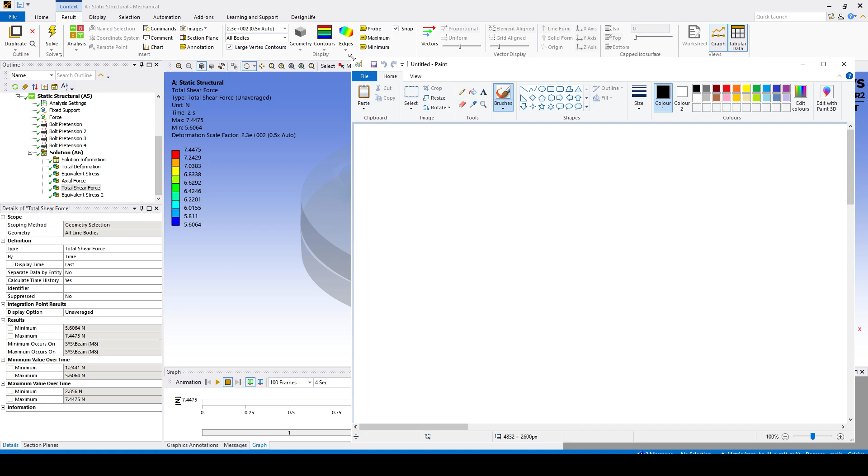What you have to get from this analysis to check the bolt is the shear force acting on the bolt. Clicking on the shear force, as you can see, we got around 7.4 newton as a maximum shear force. So let's write this alongside. Shear force, we get around 7.4. Let's make it 8 newton to be conservative, just as a shear force acting on this bolt.

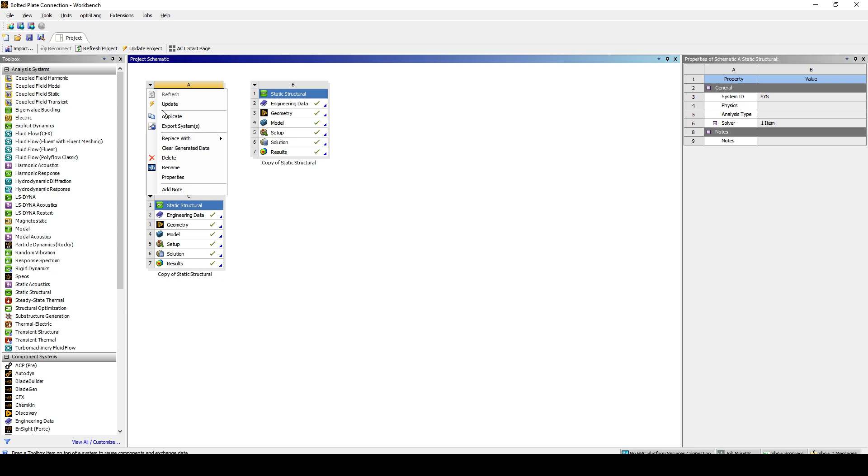Now, for the next step, we need to know the axial force acting on the bolt, but without defining the bolt pretension. To do this, you go back to the Workbench schematic, duplicate this analysis and run the simulation again, but without bolt pretension. I already did this, so I will show you in steps how this could be done.

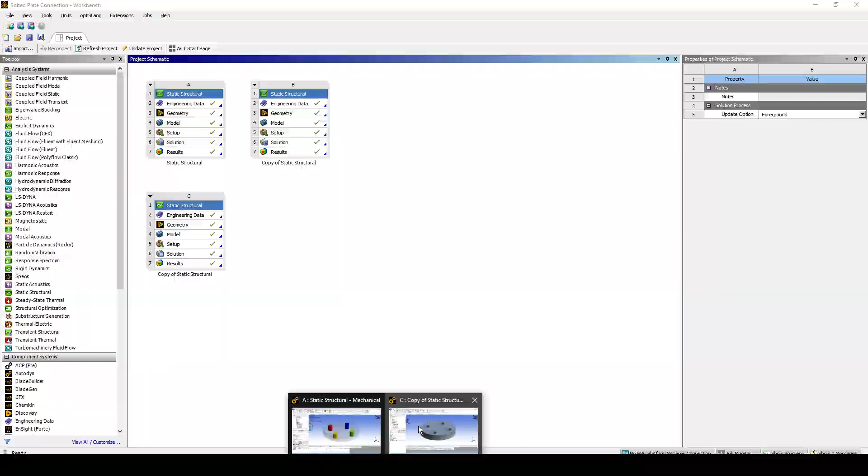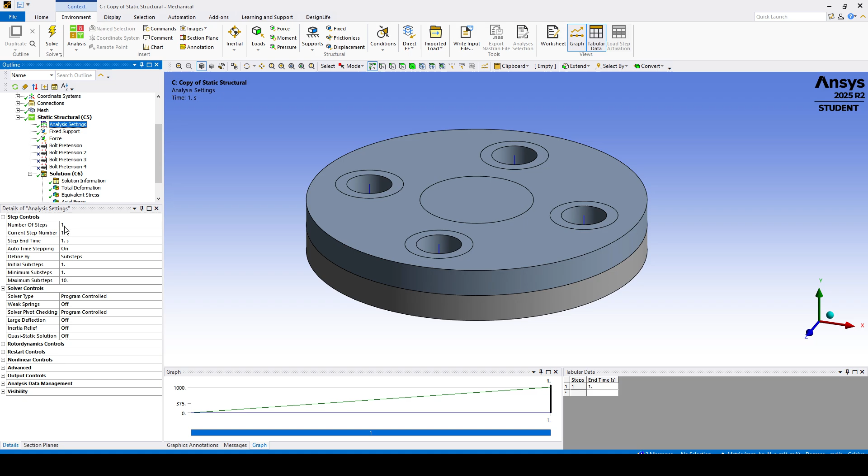After duplicating this analysis, you will get a new analysis. You open it, and you have to suppress all the bolt pretensions by clicking on them and clicking on suppress. Because you suppressed the bolt pretension, there's no need anymore to define two steps in the analysis settings, so you can define just one step instead of two. And don't forget to go to the force and move the 1000 newton to the first step. Like this, the analysis will be ready.

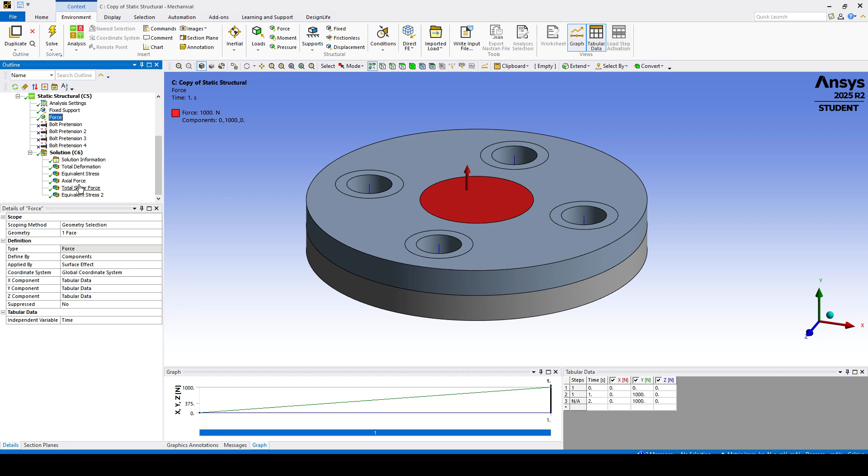After you define the boundary conditions like this, you go to the solution and solve the problem. Then all you need from this new analysis is to check the axial force acting on the bolt, which is the external axial force. As you can see here, we have around 416 or 417 newton acting on the bolt. So let's write this aside: axial force on this bolt is 417 newton.

Now let's go further and see according to the VDI guidelines if the chosen M8 bolt was okay or not. From the guideline itself, you can see on the screen to the left this table and the approach for how to use it. First of all, we have to check one condition. If the shear force divided by the frictional coefficient is greater than the axial force, then the shear force will govern and it will be the force used in the table. If it's vice versa, and the axial force is greater than the shear force divided by the frictional coefficient, then the axial force is to be selected.

Let's do an example together. First we check the 8 newton shear force divided by the frictional coefficient, which in our case was 0.12. So 8 divided by 0.12, I get around 67. Let's write here 67 newton. Now we compare this value to the axial force, and as you can see it's still much lower than the axial force. That means we should use the axial force in the table to see if the bolt size is okay or not.

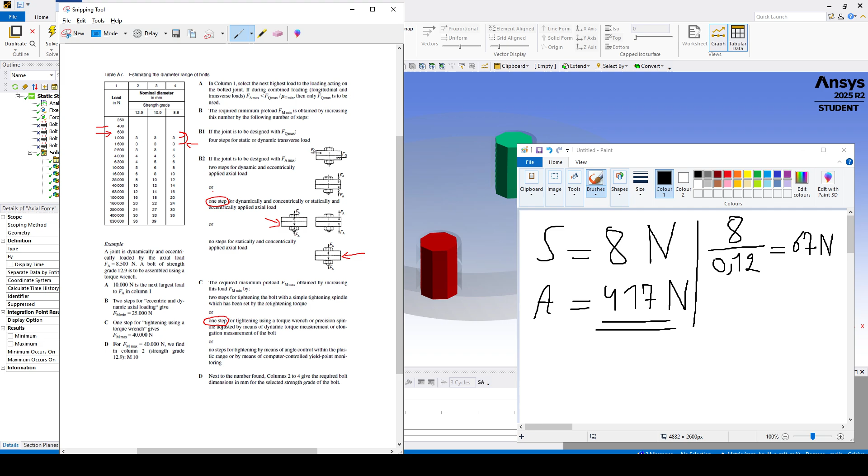This is a very simplified way to check if the bolt size is okay or not under the load defined on our system. We only had 1000 Newton as a vertical force acting on the top plate, which is not too much for these 4 M8 bolts, but according to VDI with this simplified way, we are sure now that the bolts are okay. This is the simplest way to check the bolts.

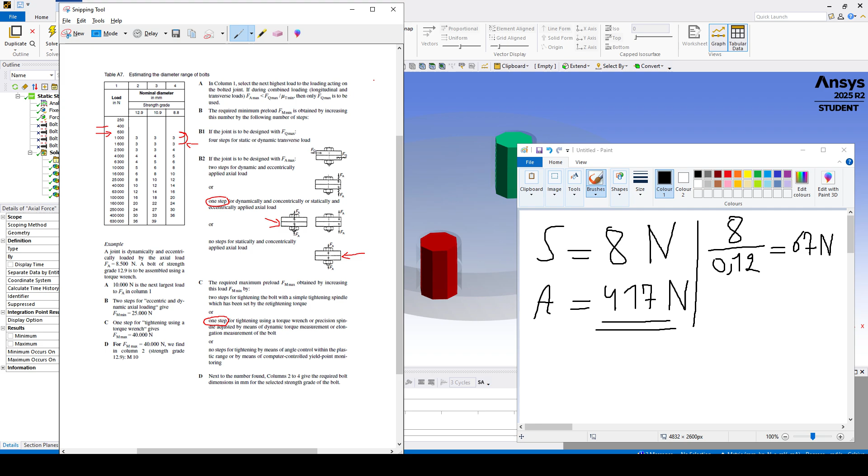Now I will show you the second approach, to see a number for how much safety factor we have against yielding for this bolt size according to the VDI 2230 guideline. To do this, we still need to know the external force acting on the bolt, which is from the analysis without bolt pretension, and in our case it was around 417 Newton. I will now show you in an Excel file I already prepared, according to the VDI guidelines, how good the bolts actually are.

In the first analysis, we chose a bolt pretension of 10,000 Newton, and I type it in this cell here, 10,000 Newton. Now, from the analysis without bolt pretension, we got the external axial force 417 Newton, and from the VDI guidelines, I got a load factor of 0.15, which comes from the formula of the stiffness of the bolt and the stiffness of the connecting plate. You can see this in detail in the VDI guidelines.

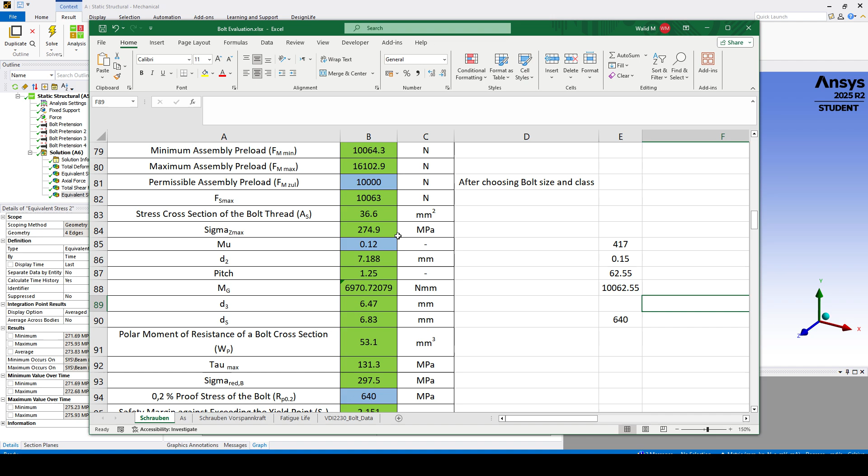But this is not all. Okay, this is right for now, but there's still one step missing. So let's go back to the table. It's right that we have only 275 megapascal on the bolt, but we still have extra stresses coming from the tightening of this bolt. According to this analytical calculation, for this reduced bolt pretension of 10,000 Newton, I expect to have around 131 megapascal from the tightening.

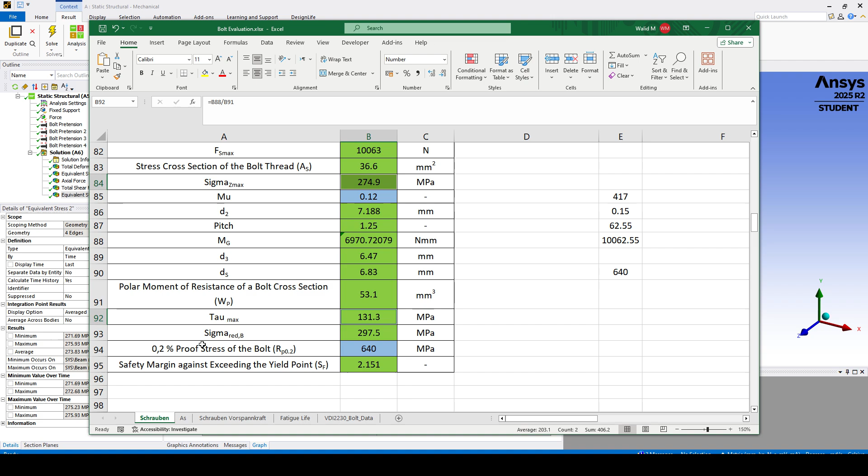So from this now, the total von Mises stress will be calculated from both the tau and the sigma stresses. We get as a final stress acting on the bolt around 297, and this is what the simulation is not showing us, because the tightening factor is like an extra load that will actually act on the bolt.

So this is the final stress acting on the bolt, and now comparing this to the yield strength of the bolt used in our model, which was with a grade strength of 8.8. That means we have a yield strength of about 640 megapascal. We got a final safety factor of about 2.15. That means from that simplified way we got the answer whether the bolt is big enough or not from this table or this approach.

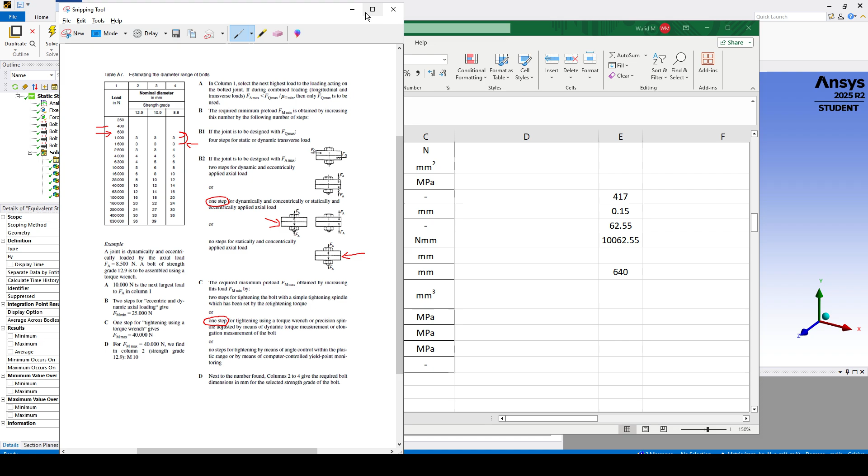And if we need further detail, to know the safety factor against yielding, for example, according to this analytical calculation, which is based on the VDI 2230 guidelines, we got approximately a value of around 2.15 as a safety factor against yielding. So this is the second method, with which we get more details about your bolt.

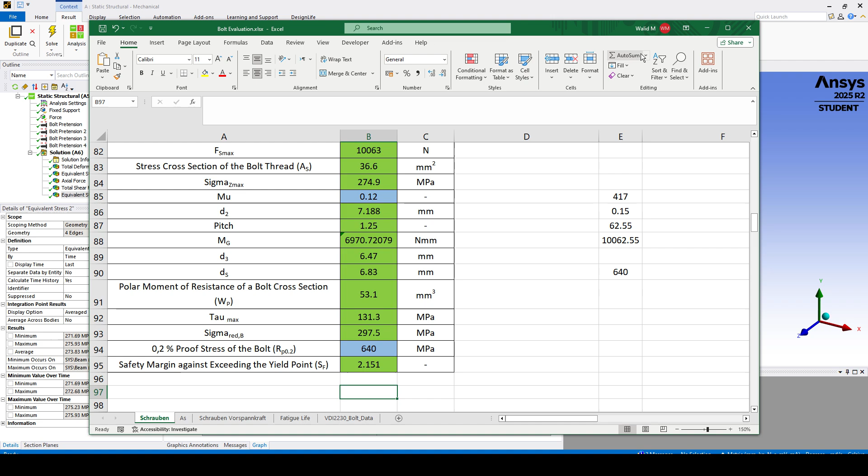I can show you right now also the final check against shearing. And to do this, we can do the following. To check the safety factor against shear for this bolt, we could use according to VDI the following formula: the tau, which comes from the ultimate strength of the material, which is 800 megapascal, multiplied by a factor of 0.65, and this factor is only relevant to the bolt with a grade strength of 8.8,

divided by the shear stress, which is low in our case, so we are expecting to have a very high safety factor. But let's do it just as an example for now. So we have 8 Newton as a shear force divided by the cross-sectional area of this chosen bolt, which is 36.6 millimeters square. And out of this formula you will get the safety factor for this bolt against shearing. So let's calculate this together.

So for now, 800 times 0.65, so I have 520. It will be divided by 8 divided by 36.6, so I got 0.2186. And the final answer, the safety factor against shearing, will be 520 divided by 0.2186. So we have a huge safety factor against shearing because the shear force is like nothing. We got around 2378 as a safety factor, but it's too huge.

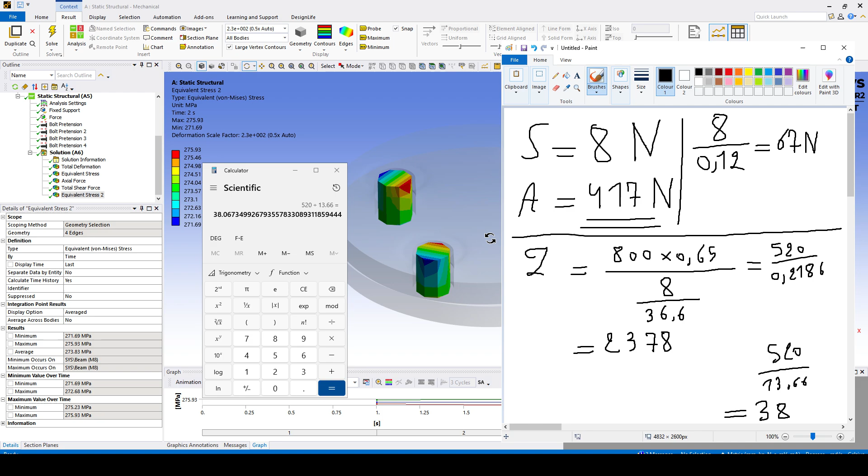But in our model the bolts are not overloaded against shearing, they are only axially loaded. So of course we got a huge safety factor against shearing. So like this, we got the safety factors until now: the safety factor against yielding, the safety factor against shearing, and we already learned how to check the bolt in a simplified way according to the VDI guidelines.

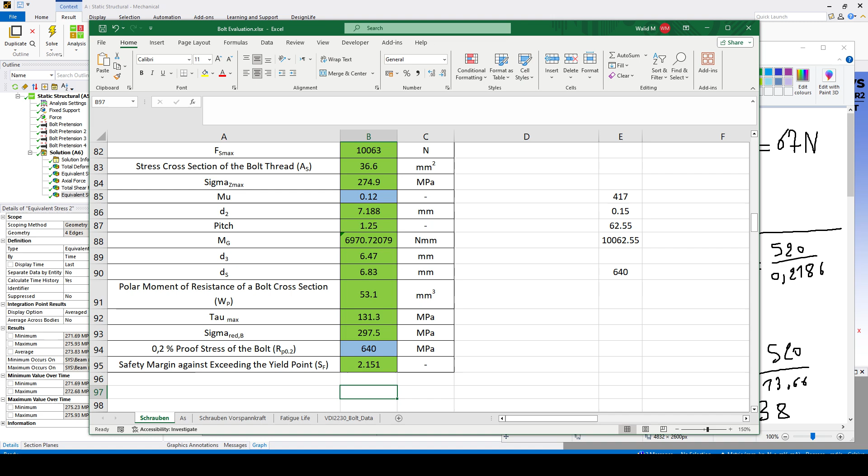A small verification of the clamping force on our model for now in this analysis. As we saw before, the total expected force on the bolt will be around 10,063 Newton, and as a minimum I'm expecting a clamping force in the two plates of around 1040 Newton, which is enough for the plates we have. Of course, when you have higher and higher axial force acting on the bolt, the clamping force, as we learned before, will decrease.